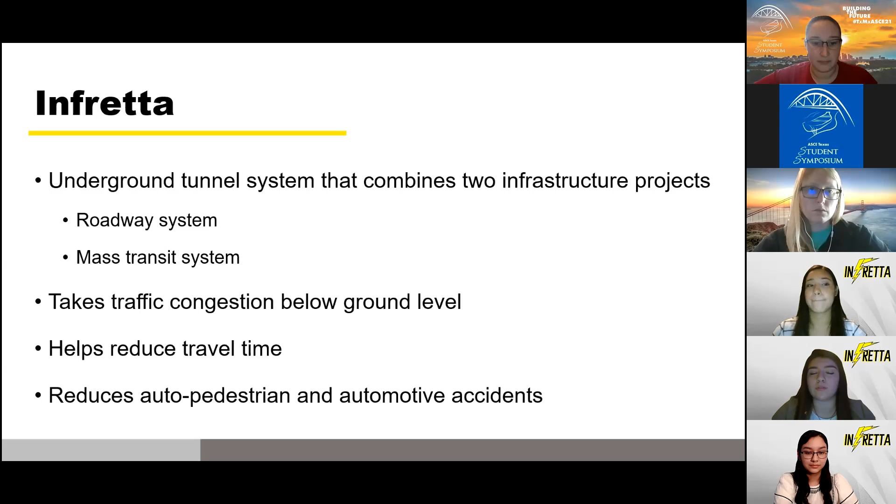Infretta is composed of two underground tunnels, which have two decks in each. The top deck is reserved for vehicles, and the bottom one will have a 24-hour subway transit system. This will allow for practical use of above-ground level by promoting eco-friendly and sustainable project development at the surface level.

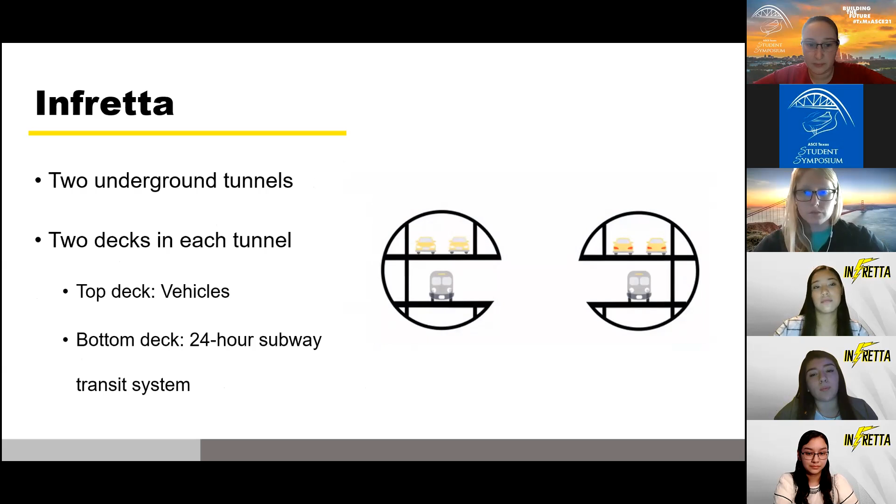Aside from this, Infretta can aid in preserving historic character present in the city, along with boosting the economy and labor market.

The top deck will be reserved for one-way traffic and is primarily reserved for personal vehicles. Each tunnel would have traffic going in opposite directions, and this deck will reduce the amount of time it takes to travel 1 mile, as well as alleviating traffic congestion expenses.

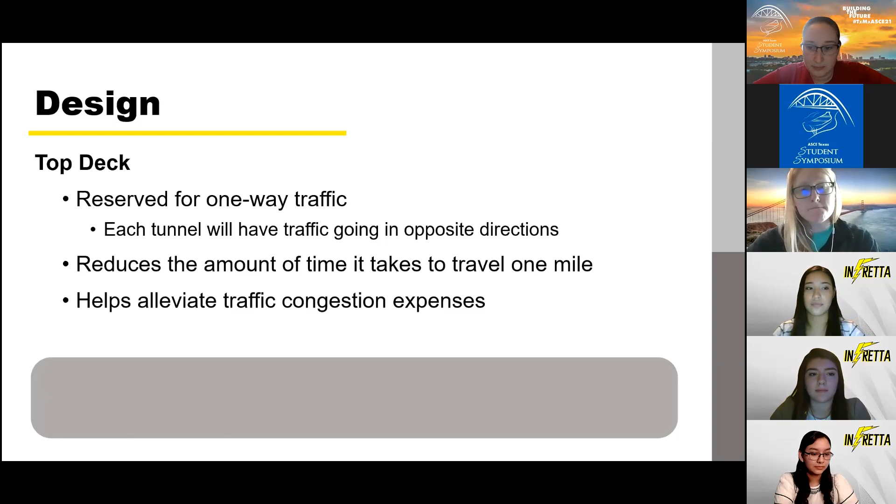The bottom deck, on the other hand, would consist of only the subway transit system that would be available to the public with the incorporation of a subscription system. This subscription system will be made affordable to the middle class and lower class citizens who may not have reliable or personal transportation.

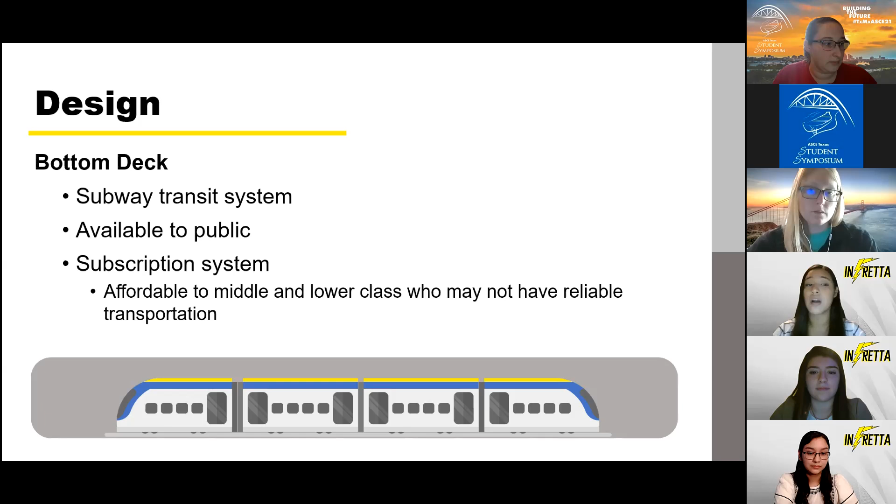The proposed megacity can be closely envisioned from what has already been seen in large and heavily populated cities in our present day. From research conducted in 2011, traffic congestion, which Infretta targets to resolve, had cost the American average commuter $818 in lost time and fuel. According to a US Department of Transportation report, within a 20-year period, there's been an estimated 50% increase in congestion severity in urban areas. Upon seeing this trend, it's safe to assume that there will be an issue with the proposed megacity.

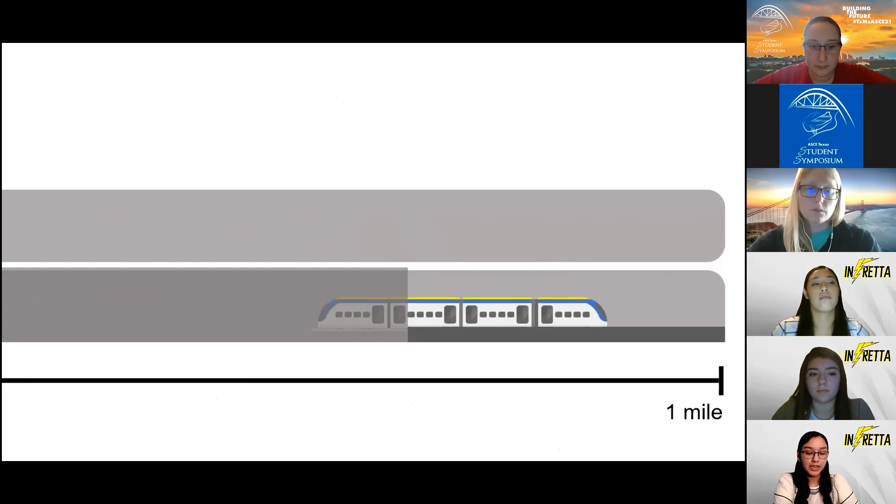Infretta will help minimize traffic congestion and reduce travel time. With the incorporation of a subway transit system, Infretta encourages people to use public transportation. From data collected in 2011, the public transit system saved the American economy $20.8 billion. Additionally, sustainable public transport systems help to alleviate greenhouse gas emissions, so the carbon footprint of the human population will be reduced.

Infretta will require the use of tunnel boring machines to dig through the underground composition of rock and soil while simultaneously placing the concrete tunnel lining with a 12-meter diameter. The tunnel will stretch for 1 mile, 30 meters beneath the surface, and depending on how much the city demands for transportation aid, more tunnel can be added.

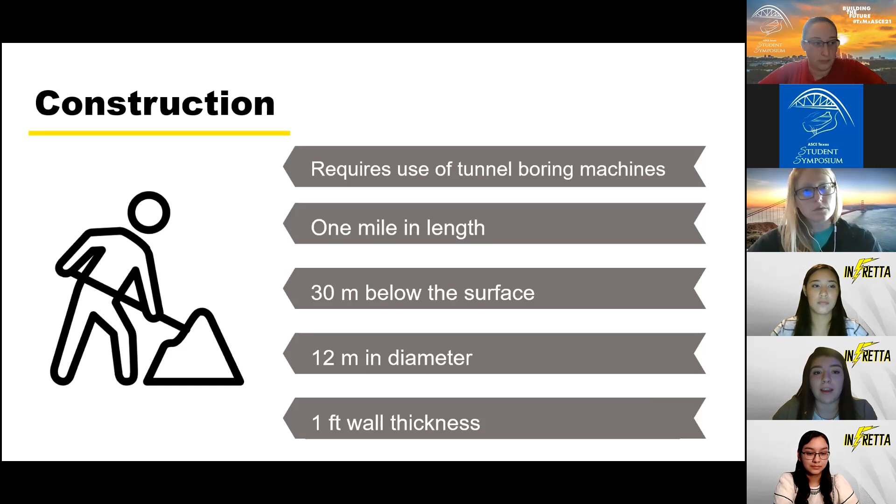This would be a unit measurement, and it would include the 2 lanes with additional space for vehicles that may break down.

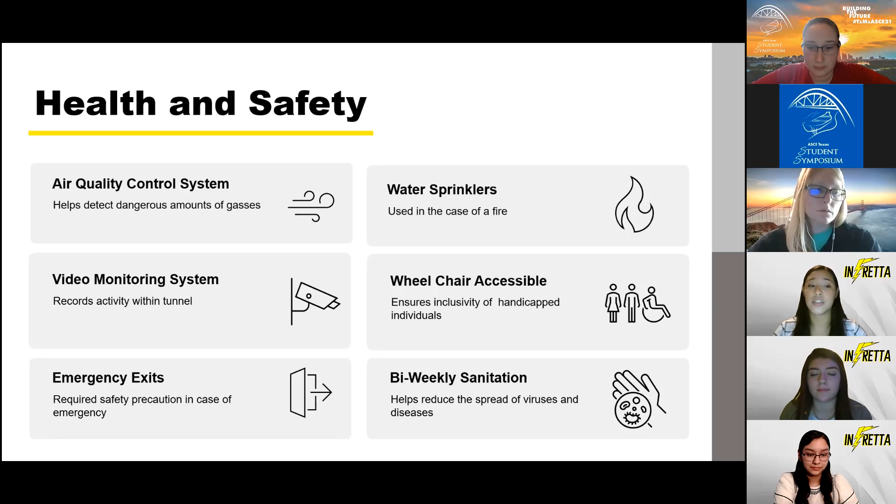For health and safety, the tunnel would have an air quality control system. It would also have a video monitoring system, emergency exits, and water sprinklers to enforce safety precautions. The tunnel would also be wheelchair accessible, helping promote inclusivity. Additionally, considering the recent and ongoing COVID-19 pandemic, it would be required that the tunnel go through bi-weekly sanitation to help reduce the spread of any viruses or diseases.

Infretta allows people to go out and work knowing that they will have a steady and reliable transportation system. It is anticipated that there will be an estimated 5 million daily transit commuters. With that, it is expected that the costs remain reasonable to be able to make the transit system easily available to low or middle class commuters.

Because Infretta is such a large-scale project, it will require that stakeholders are willing to contribute a major amount at the start for construction, but should be assured of the profit that will exceed what they initially contribute. There will be an expected profit of more than 400% by the first year to make up and exceed the one-time cost to build, as well as the yearly expenses such as maintenance and miscellaneous expenses.

Infretta is constructed to be able to withhold a long lifespan and be able to adjust to any new societal norms seen in the future, such as advancements in primary modes of transportation.

Are there any questions?

All right, thank you guys. I do have one question so far.

How would you guys design your exit and entrance ramps? What's your idea for how people actually get into the tunnel to drive?

The entrance and exit ramps would be, in a sense, because the tunnel would be below ground, designed from regular surface level, angled downwards into the tunnel. And since we're stating there will be two tunnels, one with traffic going this way and another going that way, we would design one main road that would divide into two, directing the direction of traffic to revolve around what's already given in the megacity.

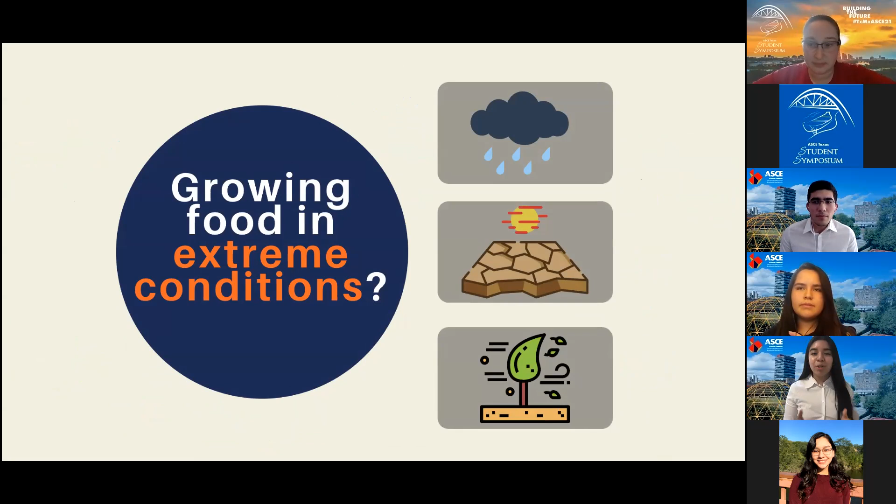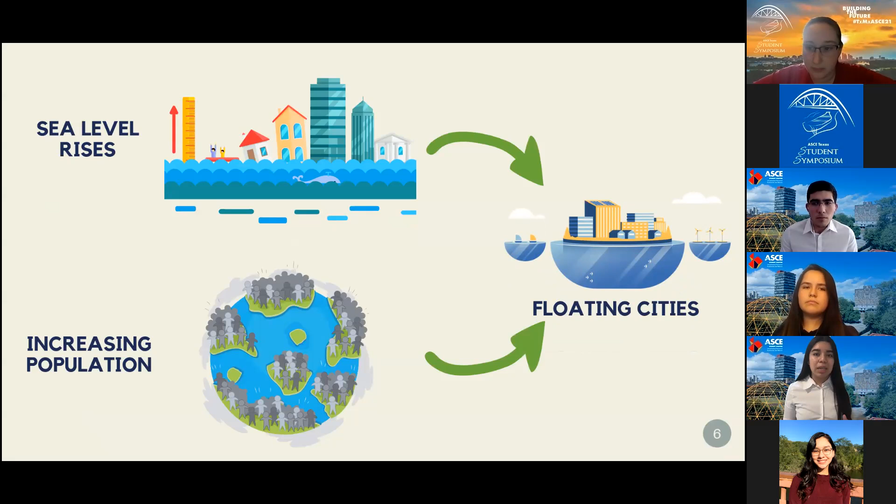The rising sea level and increasing population are the main problems sought to be solved with the creation of floating cities. However, one of these cities' most significant challenges is to achieve autonomy in all aspects. Food is one of the most important, because according to forecasts, the Earth's world population will increase to 9.7 billion people by 2050.

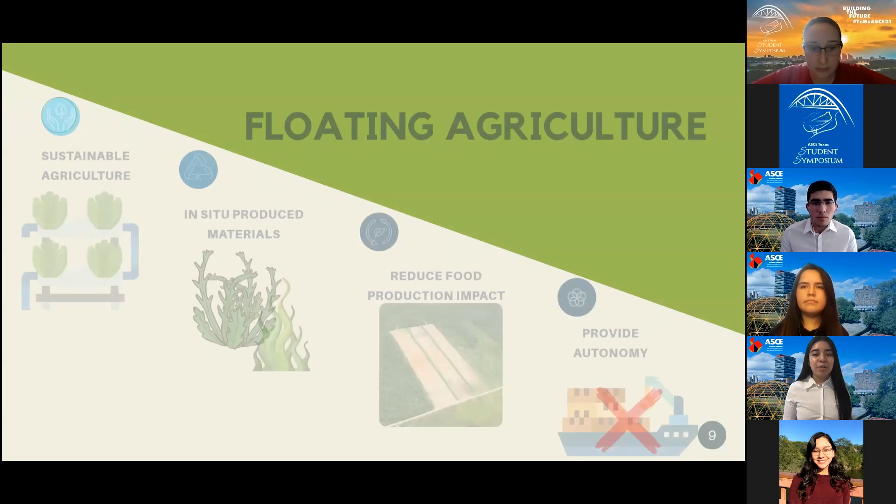The solution? Floating agriculture. It is an infrastructure proposal that seeks to solve these problems by creating floating spaces to practice sustainable agriculture, mainly using in situ produced materials, reducing food production's overall impact, and providing greater autonomy to floating cities.

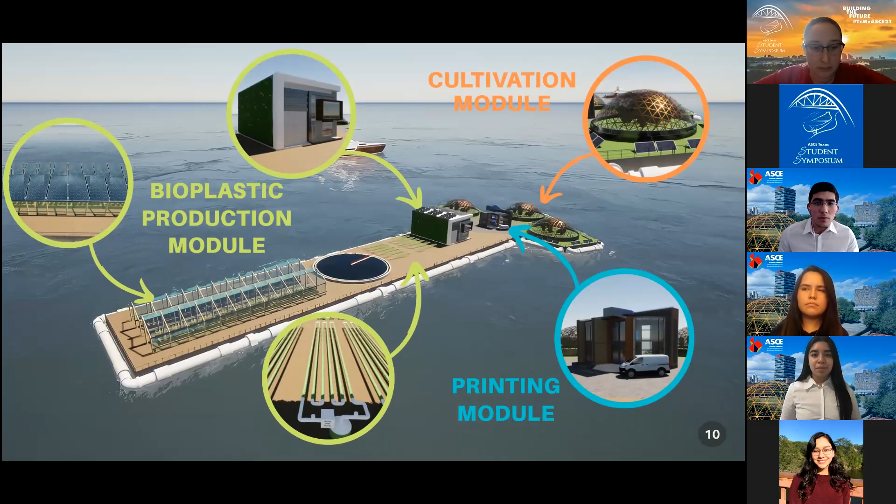The construction and operation process consists of a series of structured steps where high-level technology and advanced engineering solutions will be implemented. Floating agriculture is a project composed of three types of modules: the bioplastic production, the printing, and the cultivation module. First, in the bioplastic production module, wastewater will be treated from the floating city.

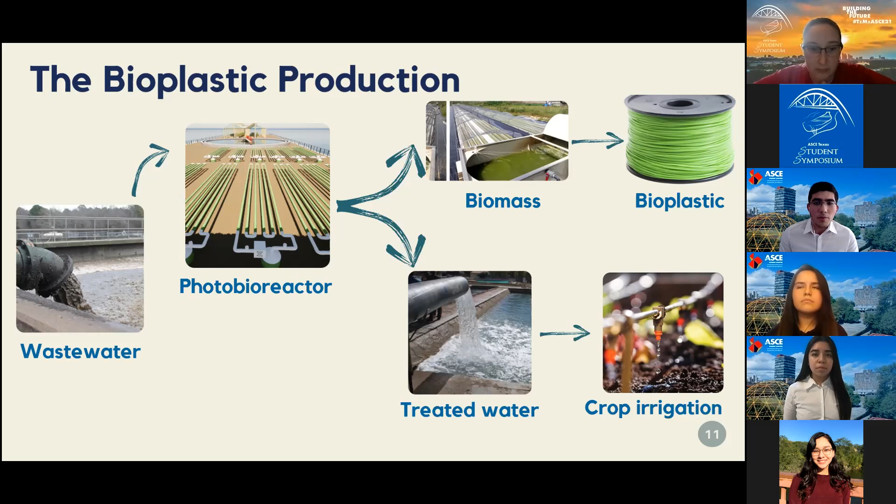It will be treated with three tubular photobioreactors. From this process, the main product obtained will be biomass for generating bioplastic. On the other hand, as a byproduct, treated water will be obtained for irrigating crops.

Second, bioplastic threads will be used as raw material in the printing module to 3D print submodules for constructing the main one and the walls of the areas destined for cultivation. 3D printing technology is essential for increasing the efficiency of the constructive procedure.

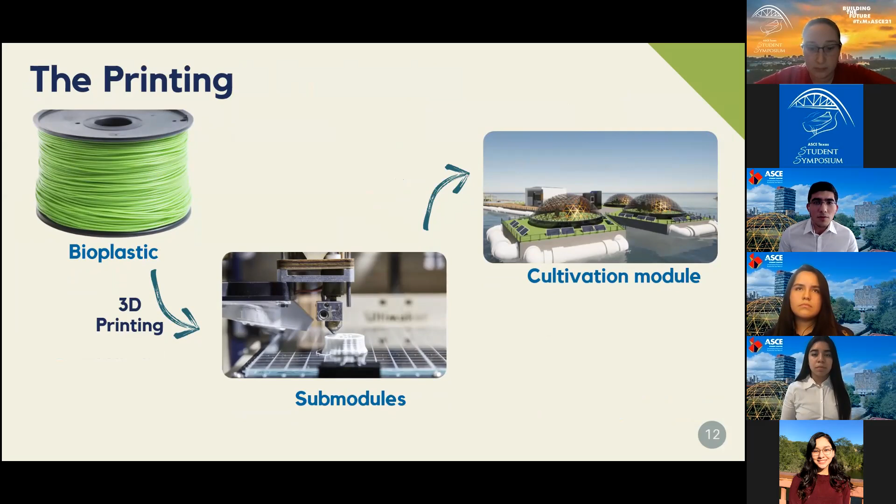Finally, taking advantage of the bioplastic production process, we will use the treated water obtained in our cultivation module. This will be through an efficient drip irrigation system, allowing us to initially grow crops such as tomatoes, carrots, and lettuce. The idea is that this proposal can be replicated and grow other crop types to satisfy the city's demand fully.

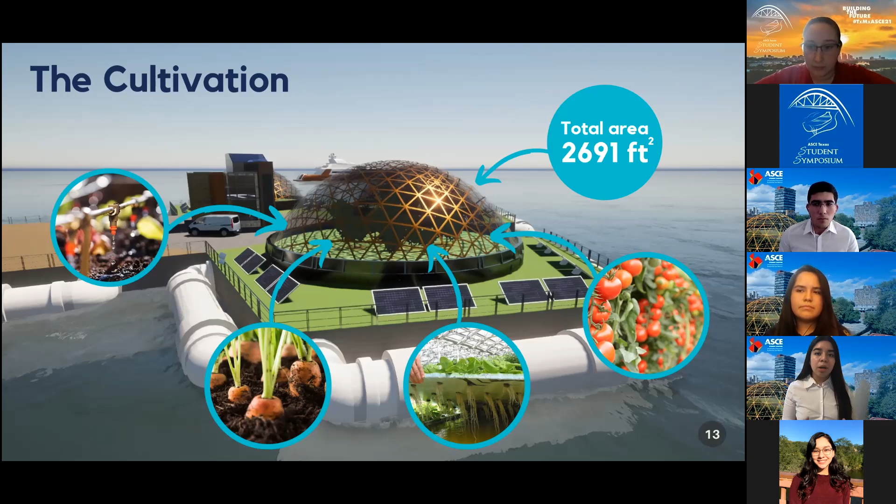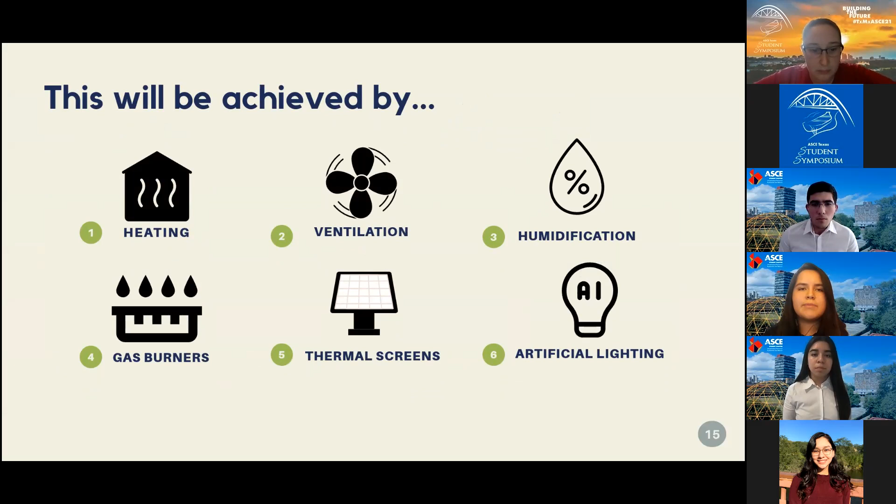But how can we face the critical climatic conditions of the coast? The answer is controlling variables such as temperature, humidity, solar radiation, and CO2 concentration. This will be achieved by installing heating, ventilation, humidification, CO2 dosing, gas burners, thermal screens, and artificial lighting.

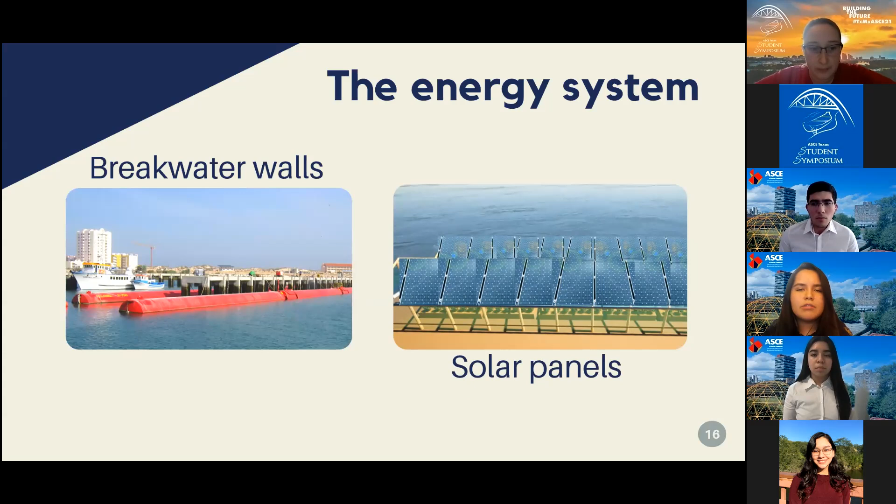Solar panels and breakwater walls included in the islands will be used to power the system, taking advantage of solar and wave power. Finally, it will have an automated monitoring system, which will require artificial and human intelligence.

The investment required to install the base system and give it proper maintenance, considering a lifespan of at least 50 years, implies a cost of $5,000 per year. However, the construction of the cultivation module will only take about 2 to 3 weeks.

Then, the system will continue generating bioplastics that would not only enable us to build the system, but also give us the potential to produce other resources needed in the cities, such as furniture and tools. This will substantially reduce the overall cost per year.

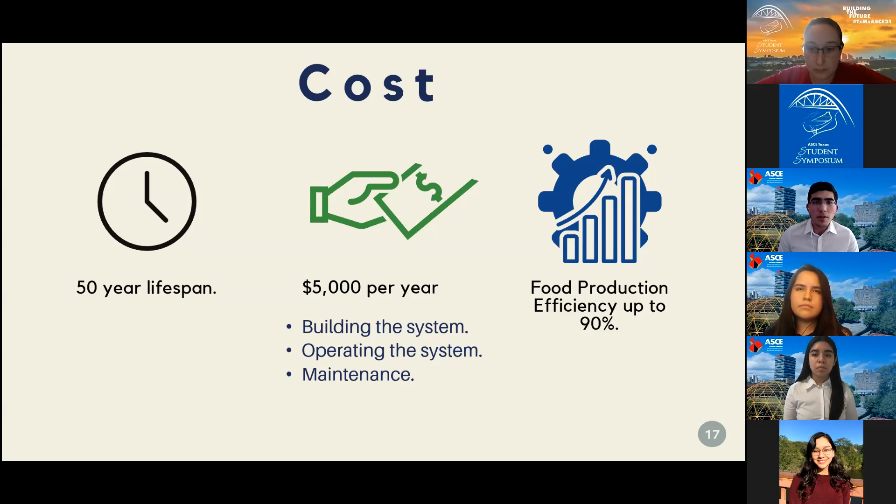In addition, production costs in floating agriculture will decrease compared to traditional agriculture, and food production efficiency will increase up to 90%. It is important to mention that this infrastructure solves traditional agriculture problems, including soil and water pollution, large amounts of greenhouse gas emissions, loss of biodiversity, and food insecurity.

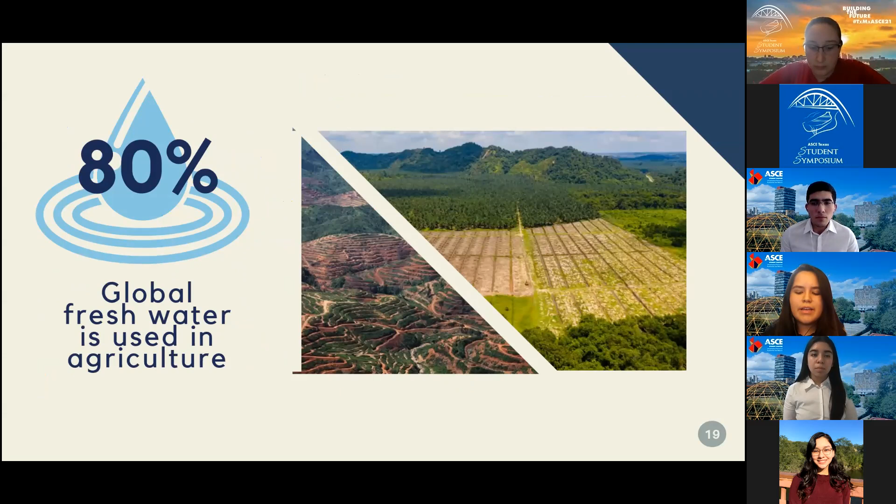Fertilizers will not be used. The utilization of renewable energy and reclaimed water will be implemented. Therefore, there will be no simplification of ecosystems, and the people will be able to access enough and a great variety of quality food. This will ensure meeting the Sustainable Development Goals of the 2030 Agenda.

As mentioned, from the planning to the operating stages, environmental, social, economic, and engineering indicators are included. This allows us to know the project's value given the benefits it will provide. It is a project designed to support inclusive and sustainable growth, the efficient use of natural resources, boost productivity, and improve life quality and social well-being.

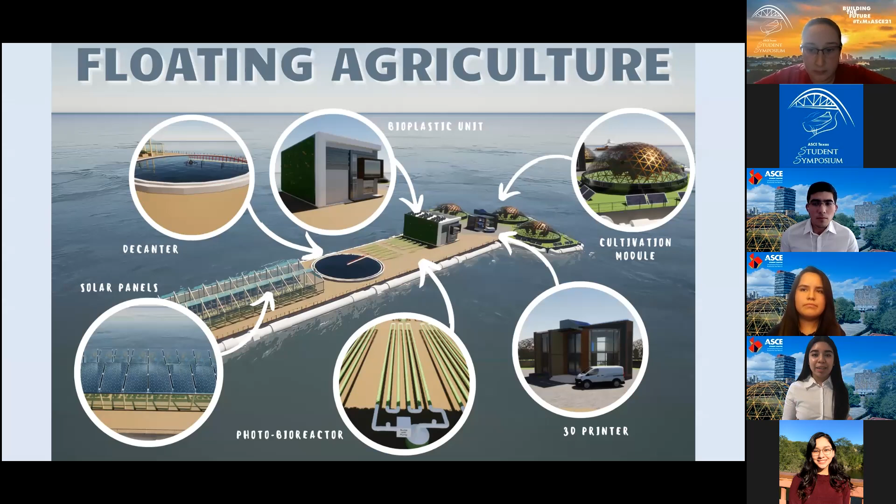Creating a space in which food can be grown must be considered a top priority to face the challenge of improved food security, especially in flooding cities. We are Floating Agriculture. Thank you for your attention.

Thank you, guys. My first question would be, how many people would it take to man this kind of floating agriculture site? And how would they get there, and how long would they stay?

Well, we are considering that there will be floating cities for when our project will begin to be applicated. So there will be many people in these floating cities that are the refugees due to the rising sea levels. And we try to achieve autonomy through the use of certain automation systems in the crop system, such as sensors and actuators that reduce the number of people needed for the project. As well, we are seeking to use robots that are instructed by commands with specific goals, not specific commands, by using artificial intelligence.

Okay, thank you. Alexis? So if I'm understanding correctly, you expect these floating agriculture bases to support a floating city. So it's in proximity, it's nearby so that they can provide it to the city, right? So how much volume of food do you expect to produce from this floating agriculture, and how many people can it support?

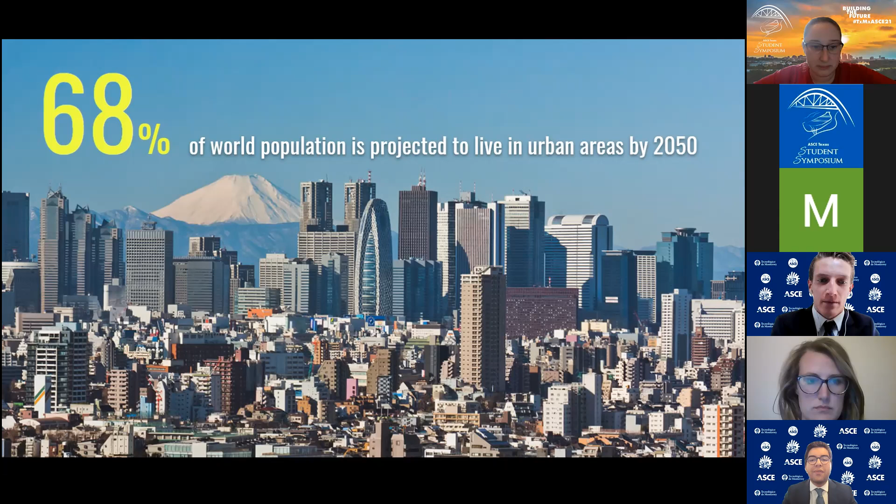According to the United Nations Department of Economic and Social Affairs, it is estimated that 68% of the world population will live in urban areas by 2050. We chose megacities because they are one of the main consumers of water, energy, and food in the world, and these urban areas are also one of the main producers of waste and carbon emissions. This will require very complex infrastructure in order to satisfy future cities' needs.

Our proposal has been developed with the purpose of being feasible rather than disruptive, as countries around the world have shown to better adopt less disruptive solutions. The plan seeks to have efficient nodes in cities that use mostly renewable energy. These nodes are not thought to divide cities. They rather have the purpose of having a more local approach to megacities problems by being semi-decentralized from energy grids, wastewater systems, rural food production, and landfill systems.

Our proposal revolves around four main aspects: energy consumption, water use and reuse, food production, and waste management. First, data from cities around the world show that energy consumption per capita is having a massive increase and will continue to grow in the next few years, as fossil fuels continue to be the main source of energy in the world.

Second, hydrological resources are limited and the effects of climate change will make it even harder to obtain water. Third, as urban population increases, so does the demand for food in cities, which are not known for their ability to produce food. Therefore, more and more food is required to be transported from rural areas to the cities. Last but not least, solid waste is usually transported to remote areas and is constantly being produced as a result of a global consumption culture.

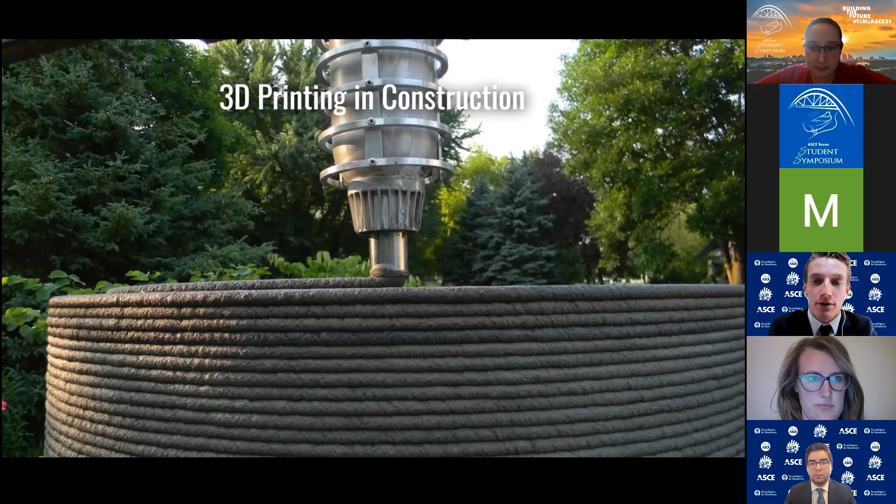Modern technologies such as 3D printing in construction are also a waste reduction solution, as they require fewer resources and less time when constructing infrastructure, and as a consequence, they reduce waste.

To wrap things up, our proposal seeks to introduce solutions for diverse problems regarding megacities by using techniques that aren't necessarily complex or expensive to implement, with the objective of making them as feasible as possible for their adoption in cities around the world. A journey of 1,000 miles begins with a single step, and we hope to be the first step towards a sustainable megacities future. Thank you.